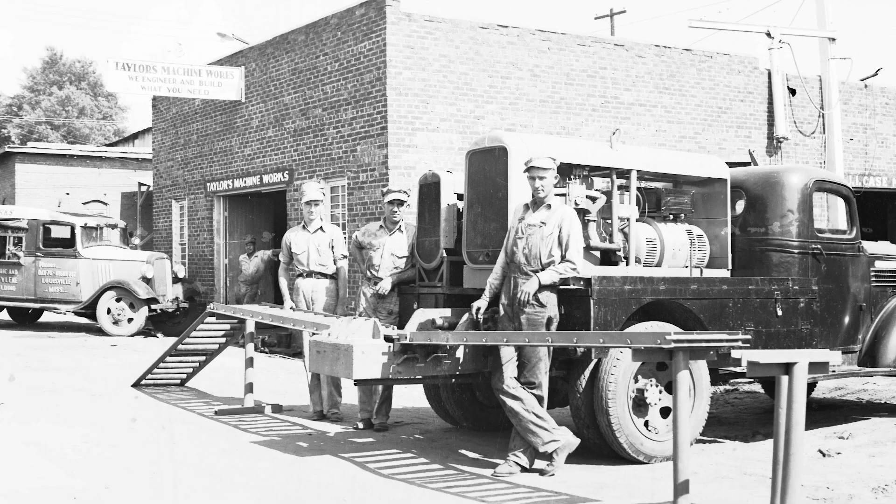He bought out a small mechanics garage here in Louisville, Mississippi in 1927. Developed that business until the first product was made, which was the Logger's Dream. It was the first mechanized way of skidding logs out of the woods and loading on a truck.

Later, we developed the first forklift, and it was actually made from an old truck chassis, and then grew into the agricultural business. My grandfather was a lover of the land, and he developed the first no-till agriculture product to actually go into a pasture and plant without tilling the soil up.

My father, Bill Taylor, came into the business in the 50s after he got back from the Korean War. He's kind of the visionary. He understood what it took to take care of a customer and what customer service really meant. And we built log skidders, we built dump bodies, and all kinds of diverse products.

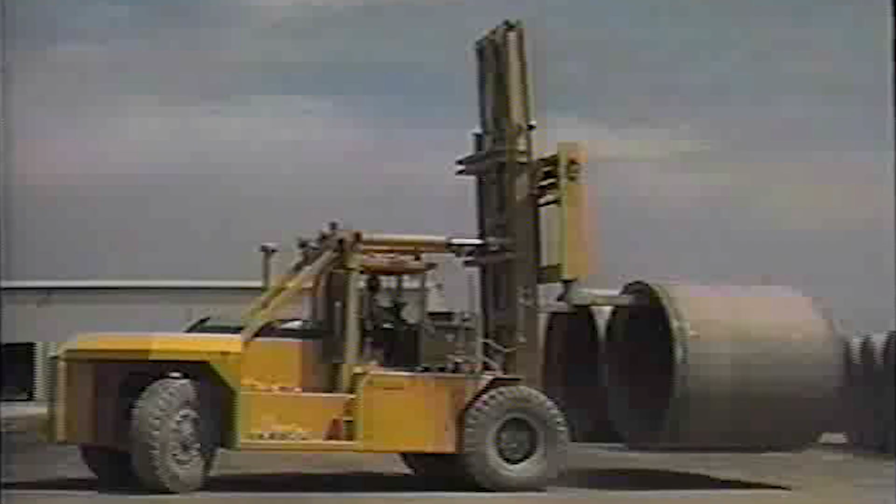And then we just kind of had to figure out what we wanted to be when we grew up. So we knew that lift trucks and material handling business was where we wanted to put our focus. 60 to 65% of everything that goes through our plants has been touched by engineering. We build things. We're not just an assembly shop. We'll always build things here at Taylor.

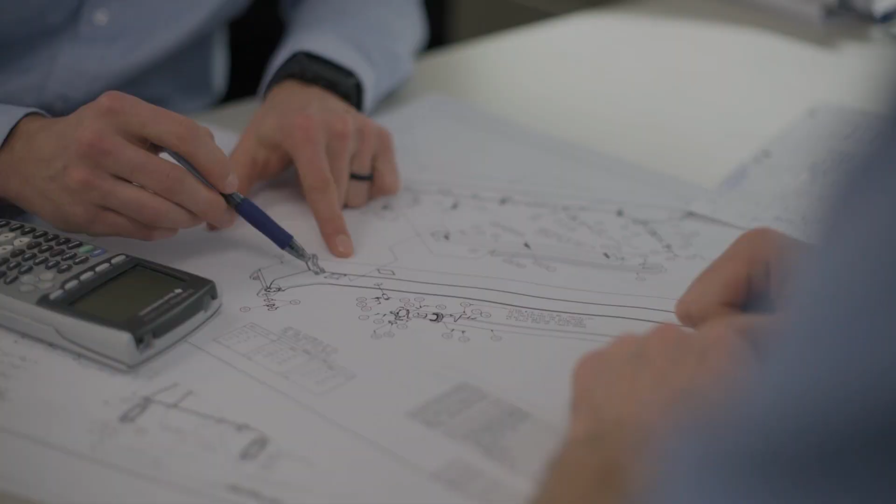I'm Matt Hillier, Director of Engineering here at Taylor. Our approach is to ask the customer what they need and then develop a solution to their problem. Instead of trying to attack a market or target some certain market and go out and sell that truck, we actually address solutions that the customers need specifically.

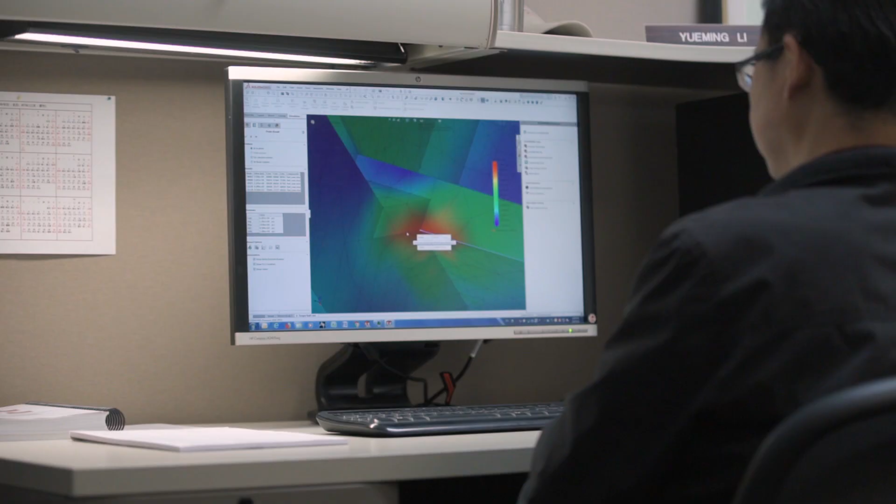So we have a front end group that all they do is design front ends and special attachments, unique things. We get involved in all sorts of unique attachments and designs. We have engineers that do structural design work that's highly analytical.

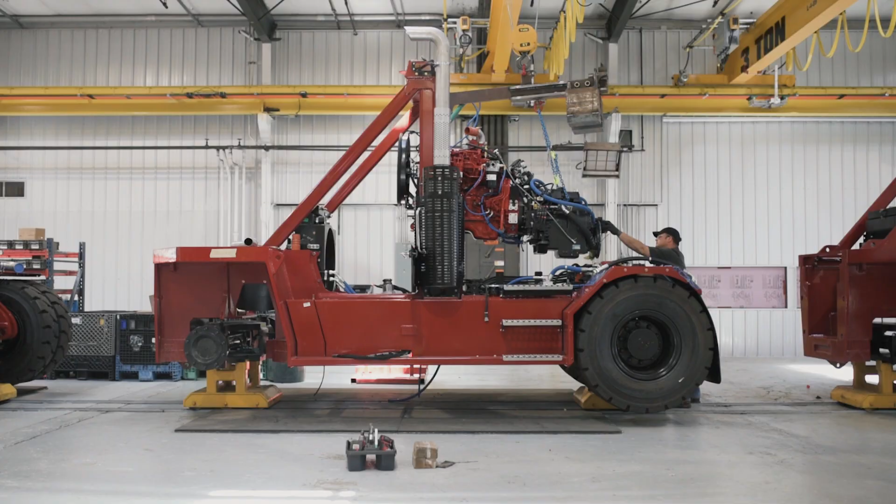You do stresses and deflections and those kinds of things when you're designing these types of structures and products. We have another group that specializes in chassis development and drivetrain, pairing engines with transmissions and drive axles to make sure that the powertrains are appropriate for the different models of trucks that we have.

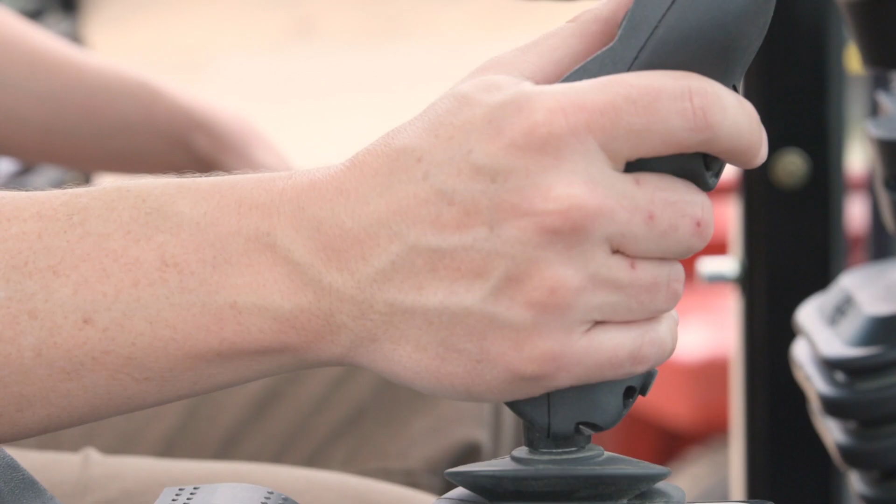Our vehicles have all the controls displayed, and it's the heartbeat of the machine, the brain of the machine. We do all that control programming in-house, so that division is responsible for all of what we call TICs, Taylor Integrated Control Systems. They do that design in-house.

So when somebody looks in the engineering department, I want them to see a group of very highly skilled, competent engineers that just enjoy what they're doing.

My name is Joe Cowart, Director of Industrial Engineering and Quality at Taylor Machine Works. Taylor Machine Works, we're more than an assembly facility. We're a manufacturer. We start with raw steel, we cut, we machine, we weld, we paint. We're vertically integrated, and that's one of the primary advantages we have over most is we can make changes quickly.

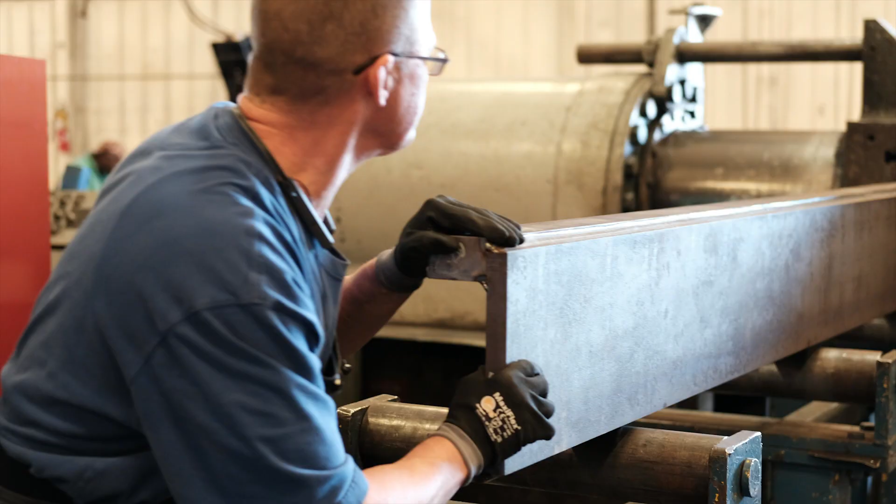We do a lot of things in the manufacturing process that most other people would do off process through a dealer. We have control of our quality, design, and fabrication all in-house. So if we want to make a change, we can make that rapidly.

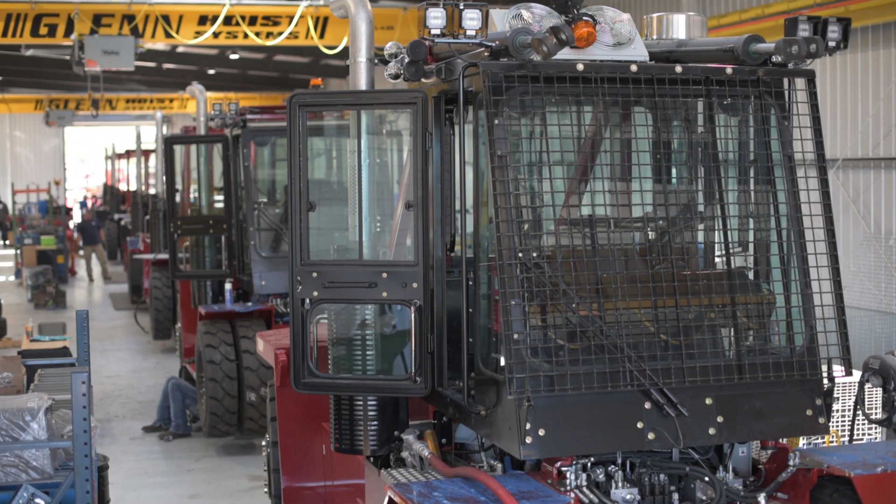We take pride in what we do. We take pride in design, we take pride in manufacture, we take pride in quality, we take pride in our people. One of the most important things I feel that Taylor Machine Works brings is their commitment to the customer.

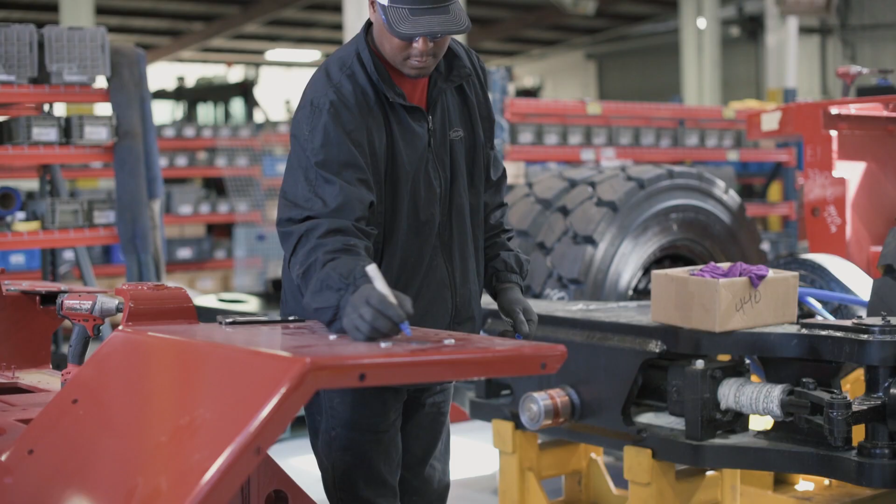It's unparalleled. If you need something, we will take care of you immediately. We ask questions later. That's our primary focus, is our customer all the way through, and that's through the Taylor Machine Works organization, SSI. Every branch of the Taylor Group takes care of the customer.

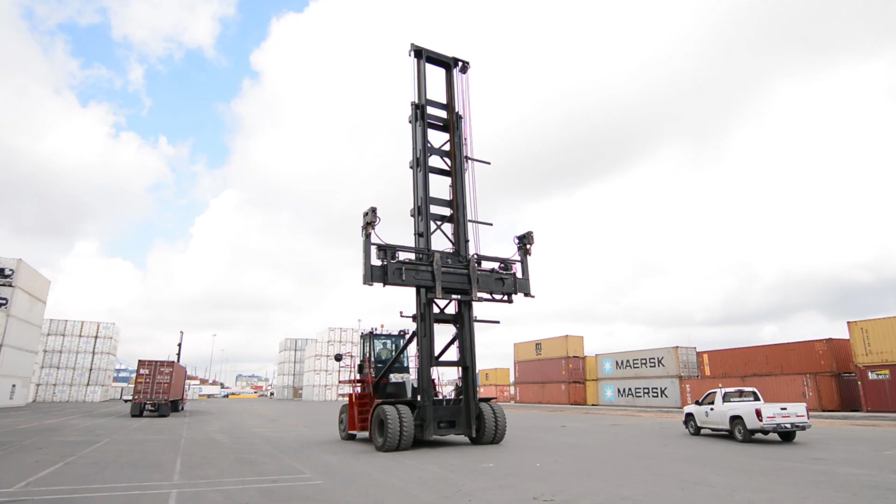My name's Hal Nowell. I'm Director of Sales at Taylor. The thing I enjoy most about working at Taylor is building long-lasting relationships with our customers.

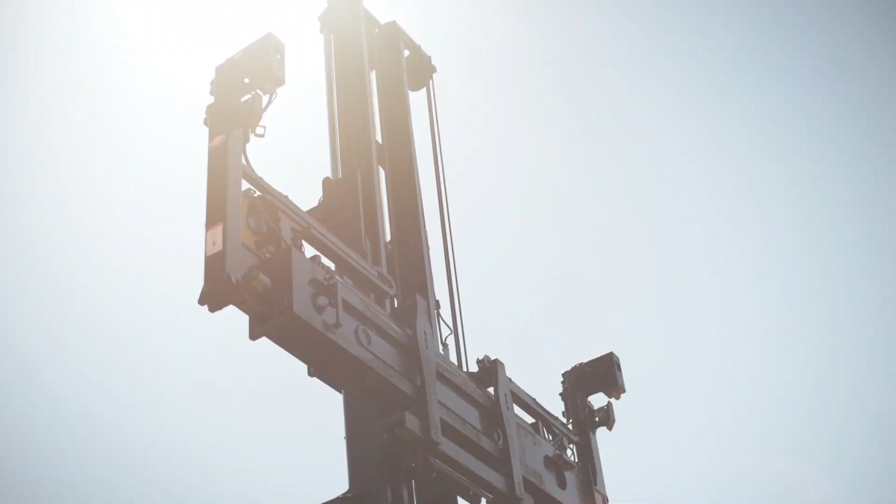Whenever we engineer and build what the customer needs, we go and look at what the customer needs, we bring it back to the engineering, we look at it, and next thing you know, we've got a product we can deliver to them. So the great thing about Taylor Machine Works, we have our sales, engineering, and service department all on location.

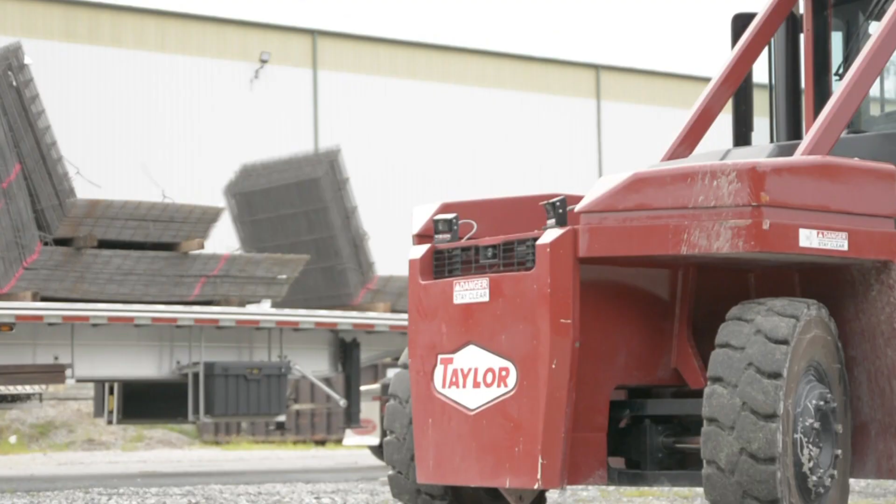So we bring an issue back that a customer might be having, and we can discuss it with everybody and come up with a proper solution for his problem. One way or the other, we're going to make our customer happy.

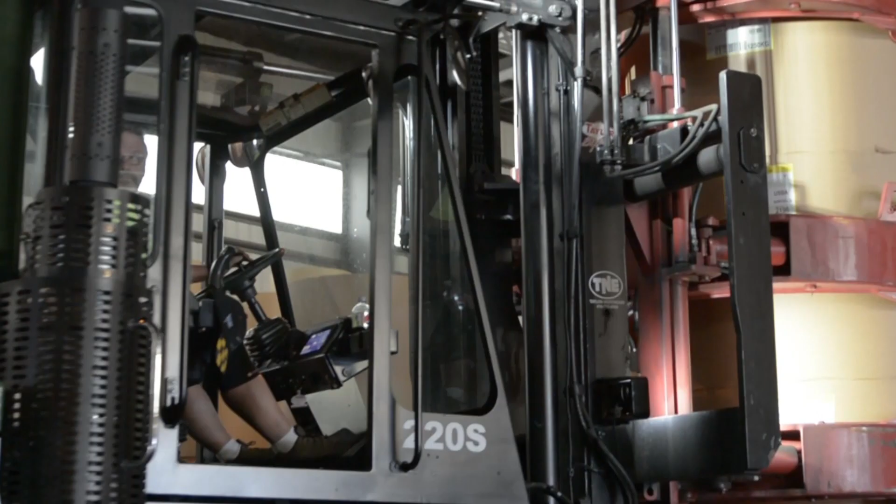We manufacture things. We're not just an assembly plant. Sudden Service Incorporated is our parts and service arm of the business. They look after all of our customers across the country. They help our dealers out, and we also have 18 factory direct stores that they look after as well.

So we have all of our engineers here who go to the field and look at customer applications, and we design specifically around those. Our machines are purpose built for an industry. We've got over 90 years of experience designing and manufacturing machines. I can't find anybody else that does that.

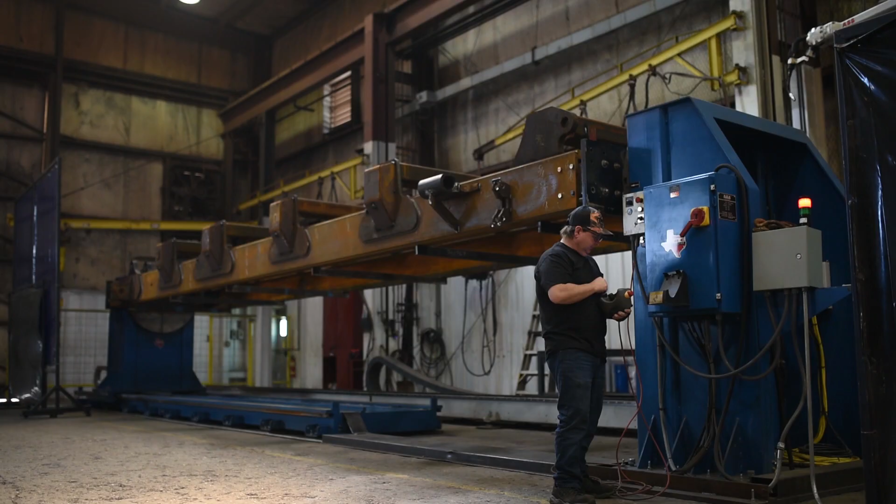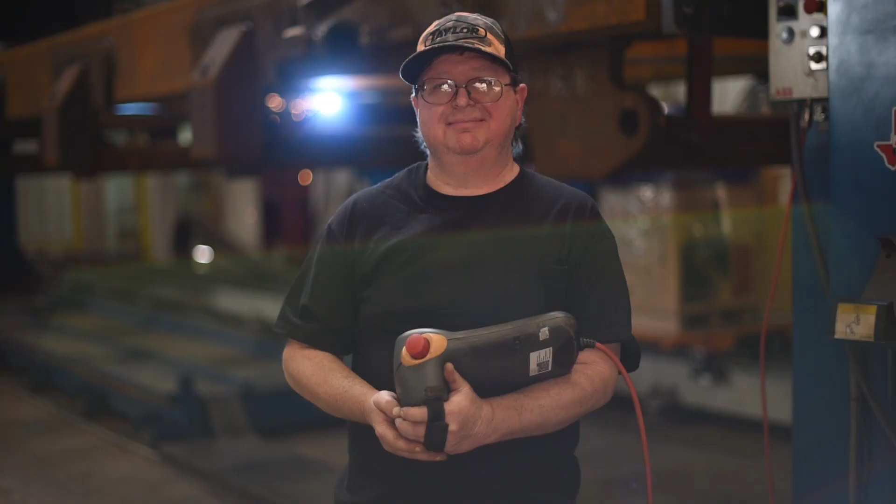Whatever is said about Taylor, whatever is said about Sudden Service, Taylor Power, Taylor Defense, Taylor Leasing and Rental, it is 100% about our people.

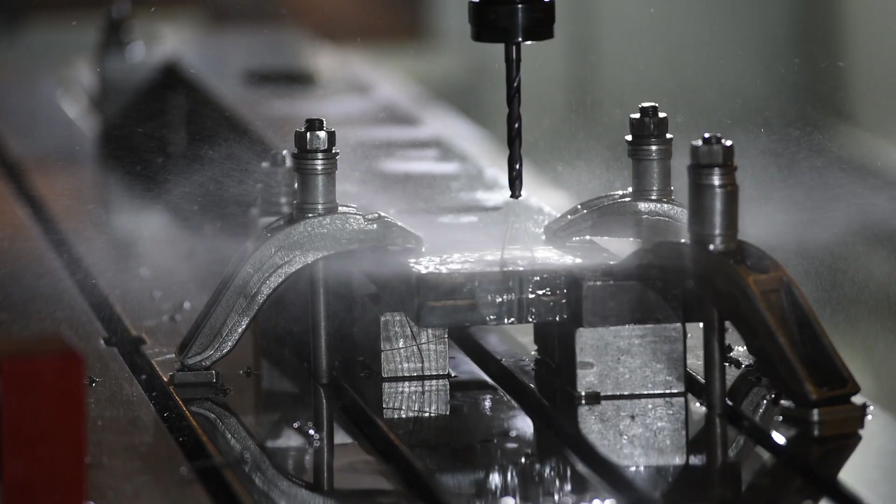We have three watchwords on the front of the building. We have faith, we have vision, we have work. It's more than a mission. It is what we are. It's our mantra.